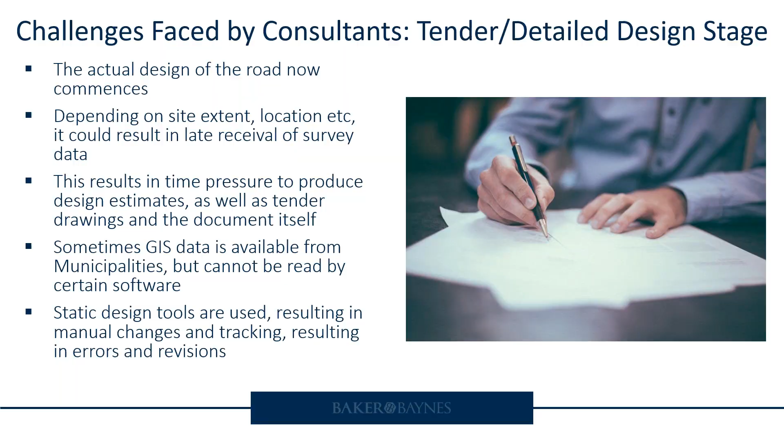All right, so now that you understand the picture, let's jump right into it. So this was the project brief that we are working on. As you know, we've got a road that's 3.2 kilometers long. It's situated at the south coast, KwaZulu-Natal, South Africa. And we were in charge of doing the road and stormwater design. And today we're going to go right up to final construction drawings.

Okay, so where did we actually stop in part one? So just look at the image on your right hand side. That tells the entire story. This is what we had at concept stage, which is mind-blowing. First of all, our advantages are we already have a 3D site at conceptual prelim level. What's associated with that is prelim survey data.

And because we had that survey data that could be imported into a CAD environment, we already have the horizontal and vertical profiles generated, which are actually dynamic. Meaning that if I had to change the radius of the curve, or if I had to move the tangent of the road or something like that, everything updates along with the long section as well as the earthworks, setting out data and so on.

We also have the technology where we can actually bring in the GIS data. So you're going to see that in a short while. Not only that, we have the option to either delete the prelim or concept stormwater network that was provided by us using an automated function in InfraWorks, or we could actually modify it. Today we're going to delete it, which most consultants actually do, and you're going to see how much quicker it's going to be. Last but not least, we've got a dynamic interface.

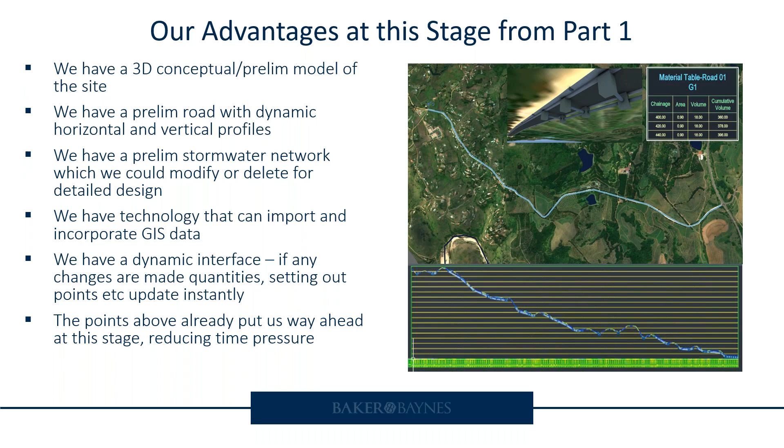Okay, so let's start off by creating a project and collaborating with the teams remotely. Now we're going to use this for Civil 3D, and you're going to see how much easier this is. Because even though we are in level 1, certain team members still might be distributed at home or working at the office, you might be at the construction site, you still need to collaborate irrespective of circumstance. So let's actually look at what we can do.

So let's jump into BIM 360, now known as Autodesk Docs. So you will see that I'm actually signing in here with my Autodesk account. Great thing is if you have the AEC collection, you will have access to this now. So check it out under your project list. So what we can do is give our project a name. So I'm going to be very generic as usual. So Roads Webinar 2021, we can actually select the type of project that it is going to be.

Okay, so you can see there's a lot of categories that are already preloaded into Autodesk Docs, right? And I'm going to just use that one there. And then the construction type, I can set that. I can put in a project value. We can select currency. I wish it was USD, but we will go to rands, right? And then you can also specify the contract type, start and end. It's really nice to do this.

Reason being is that when you generate reports in Autodesk Docs, it is automated and it has a lot of this information preloaded in. All right, so you can see you can give it an end date, start date, you can set the contract. Again, the fields that have an asterisk next to it are compulsory, the rest are fairly optional. I can even attach an image. So let's go and do that, make it look a little bit fancy, if we could use that word. And you can see we have attached the image. We can also populate the project address, which I strongly recommend. You're going to see that. So I've just put that in quickly.

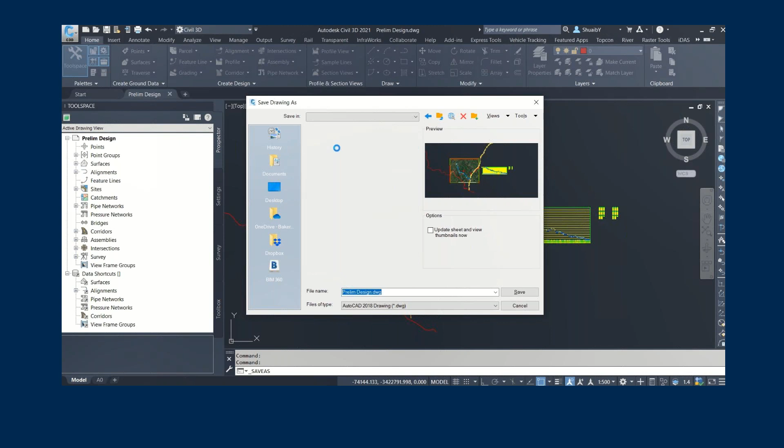Okay, so I'm going to drop it in there and hit save. And once I do that, you'll see it actually shows you that it's saved to the cloud. You've got cloud in brackets there, which is quite cool. So now this is automatically on the cloud, and you've also got the BIM 360 button that syncs in directly with Civil 3D. Again, this also applies to Revit as well as Plant 3D.

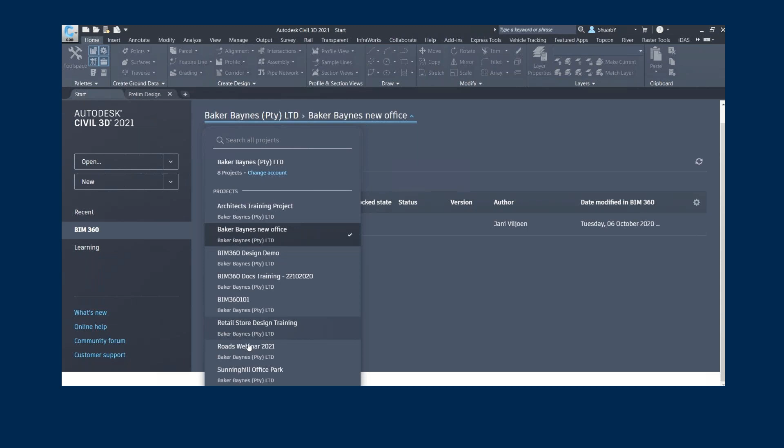And if I go to my folder, you'll see that I will see the same folder structure in Civil 3D itself, which is quite nice. And here we are—actually, I must just move that into Prelim, I think I didn't select that folder correctly, but it's there.

Okay, it's as simple as moving, same thing you would do on your desktop. All right, so our file is now on Autodesk Docs.

The next thing, of course, you've seen that I've created a folder for the Civil 3D data shortcuts. If you're not familiar what data shortcuts are, it allows you to link in files and other users to incorporate them into their designs and work accordingly.

So let's say, for example, one person has created the site and created a data shortcut for it. That site can now be linked into the person doing the roads, and then you might have a separate person doing the pipe networks, a separate person doing the grading for the platform or where the building will actually sit on the building footprint. You can link in that data, and the person busy with it, it will be locked so I couldn't edit.

If I was doing the roads, I would not be able to edit what the stormwater engineer is doing currently. But as I refresh my drawings or update my references, I will see his model getting longer or progressing as I'm doing mine, which is pretty cool.

So let's look at how we can use Collaborate Pro, previously known as BIM 360 Design, in achieving this task.

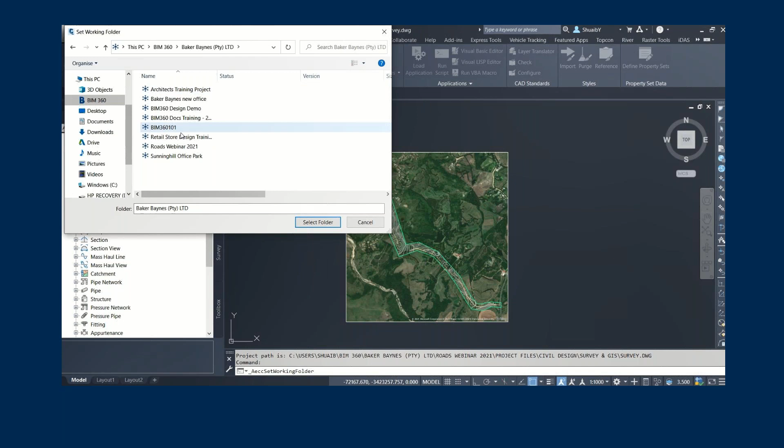First of all, you're going to need to set a working folder, and I'm going to route this instead of to my server, I'm going to do it to my BIM 360 account, which is amazing. Like I said, there's no need for servers anymore if it's cloud collaborated, and it's much more secure, right?

So you can see that data shortcut is there. Now the common mistake that users make here is not knowing where to go next. I'm going to show you this. Like you can see, that's the wrong button to create. If I go maybe to set shortcuts folder, you'll see it's blank, right?

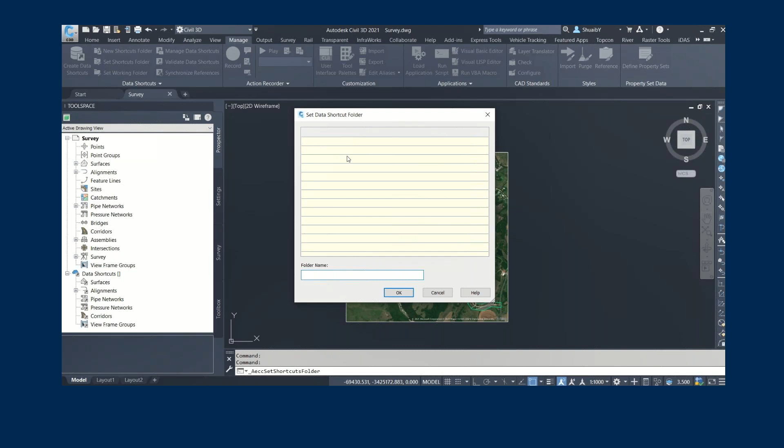Now you can do this by trial and error, but the correct thing is to actually create a new shortcuts folder. Now I can give this a name, so I'll call it Civil 3D Design Shortcuts, for example, and you can see it's already routed to my BIM 360. The cool thing is if I move it anywhere in BIM 360, it's going to update that file path automatically. We didn't have that functionality before when working off a server.

All right, so what I'm going to do is link in that survey data now, and you can see that shortcut has been created where that survey data can now be brought into my detailed design. So we've actually created the survey data. Currently you're seeing the prelim, but you're going to see how we can actually sort that out right now.

Okay, so now for the interesting part where I think everyone's going to be locked in: creating the construction design model from the prelim using Civil 3D and IDAS.

At this stage, if you're doing it the traditional way, you have no data and would have to start from scratch. But we've already got prelim data. Can we reuse or modify it? Absolutely yes. Please don't go and restart a new drawing from scratch. Although you can, I strongly don't recommend it. This is going to save you so much time. Just follow along here and you'll see what I'm talking about.

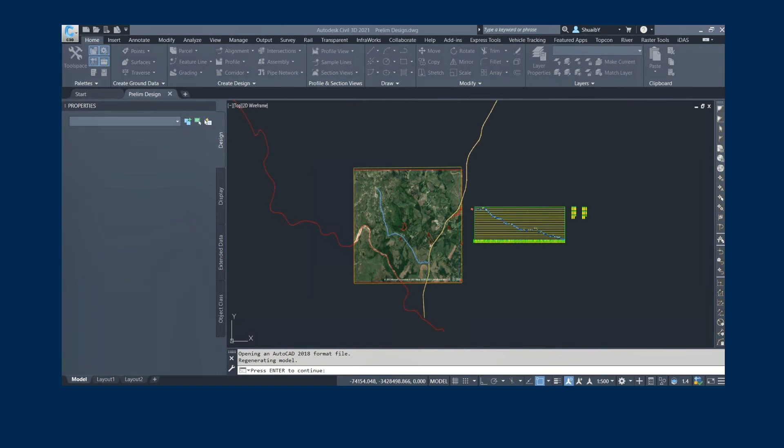Let's start by importing the survey data and GIS data captured by the surveyor. So let's switch into Civil 3D. I am going to open up the prelim design I did, which has now been uploaded to Autodesk Docs in BIM 360. You can see it's actually linking in from the cloud, so it might take a few seconds depending on the size of your drawing and your internet connection. As you can see, the file has loaded perfectly.

Now, instead of creating a new drawing, I'm going to save this as a detailed design. Simple as going to save as, giving it a name, and dropping it into BIM 360. So this will be our detailed design drawing. Now imagine if you had to do this by creating a new drawing and starting from scratch - it's going to take you much more time.

As you can see, it's already routed to my BIM 360 file path, which is perfect. I'm going to drop it in my detailed design folder. And that is it. So we've got a drawing that we can use to do our final design, so that our construction documentation and tender documentation can be generated. As you can see, it's saved on the cloud. So that is the first step.

The next step now is if we go to BIM 360, you can see that is the prelim drawing. Let's just go back here quickly. Okay, so we are importing that - I'm just going to forward this a bit quickly. Right, we saved the detailed design drawing and it is on the cloud. Now what we're going to do here, let me just skip back a little bit.

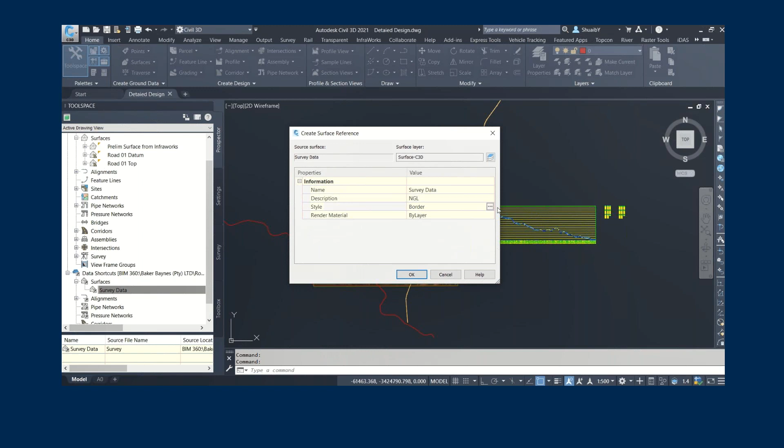We've created a data shortcut already, and you can see we've got all of the associated data from our prelim design. All I've got to do is drag and drop that survey data into the drawing. This is the data received by Anin, our surveyor, who uploaded it. I can give it a description and set whichever style I want. Let's go with a 0.5 meter to 1 meter spacing for the contours. Now we've already got the alignment in, though we might have to make adjustments depending on the final survey data. You can see it shows our survey data has been linked, and again, this is not using a server - this is using purely cloud collaboration.

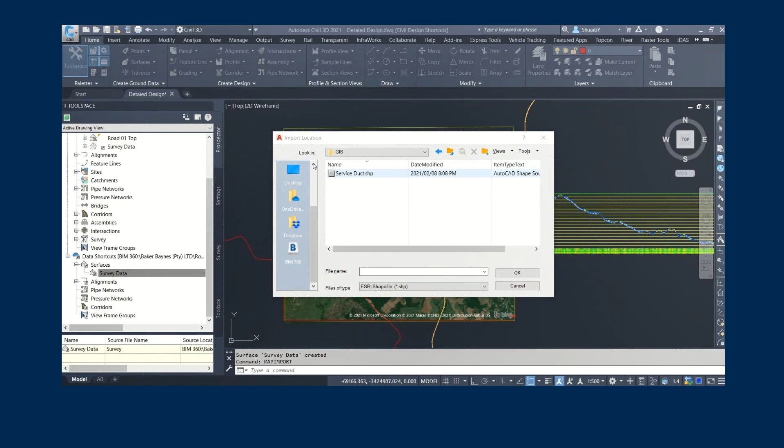Now what we're going to do next is bring in the GIS data. Anin has actually uploaded this to our cloud, so we can bring this in. You have two options: either link it from here, or most people just download it and import it into Civil 3D - it's totally up to you. If I go to the GIS folder, you'll see we've got a service duct at a certain point in the road. As you can see, I'm bringing it into Civil 3D from BIM 360 - it's downloading that very quickly.

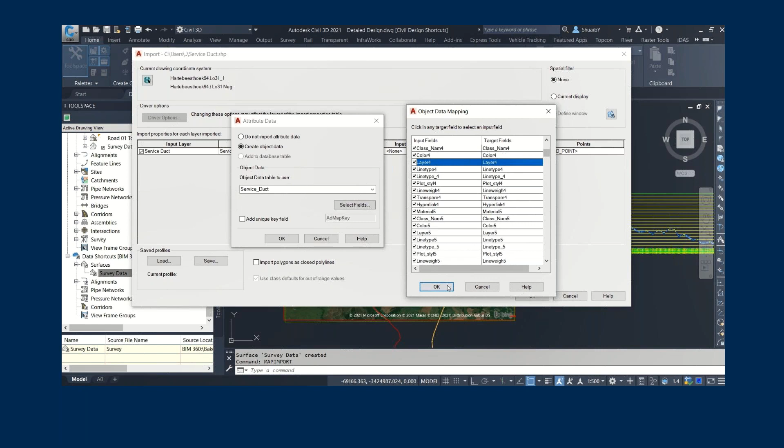Once it has been imported, you'll see the GIS menu pops up. This is built into Civil 3D. I can actually bring in the object data associated with this - sometimes you might not have any, but in this case I do. Good GIS data has a lot of metadata attached to CAD elements. If I go to select field, you can see there's a lot of metadata attached to this, some being CAD and some being different elements that I can tick on and off. I'm just going to leave it as is with all of that ticked on.

Once we hit OK and we hit OK to import that in, you can see the import has been complete. Now, if I zoom in, this is what has come in. It might look just as a polyline, but let's go and check out the actual properties. As you can see, we've got the start and end levels. We've got all of the associated data.

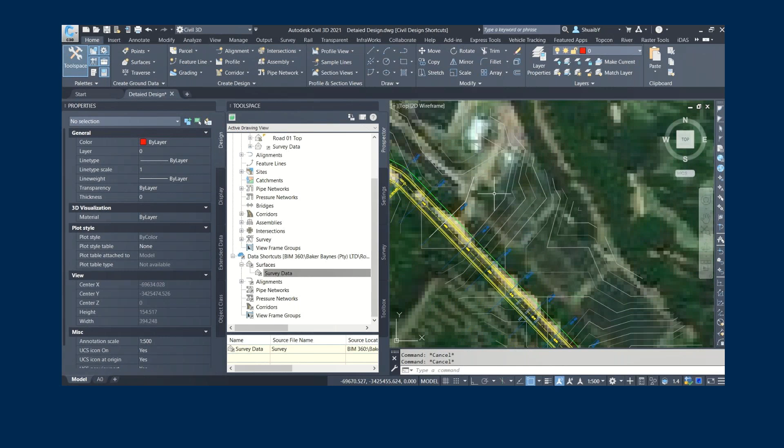Not only that, if I go to the OD, which is an object data table, there is all of the information in there. We've got the start invert, end invert, the size of that culvert. You can see it's 1.5 by 1.5, so maybe like a duct type of scenario that's running below the road or below the NGL at that point. So you can see how easy it is to actually generate or incorporate GIS data into your design.

But we don't want to just stop there. We want to actually create an object from it. Now let's look at what we can do. Again, we are using the Devitech iDAS template for Civil 3D, which is fantastic. Strongly recommend that you use it. And what we're going to do is we're going to change that or assign an object to it.

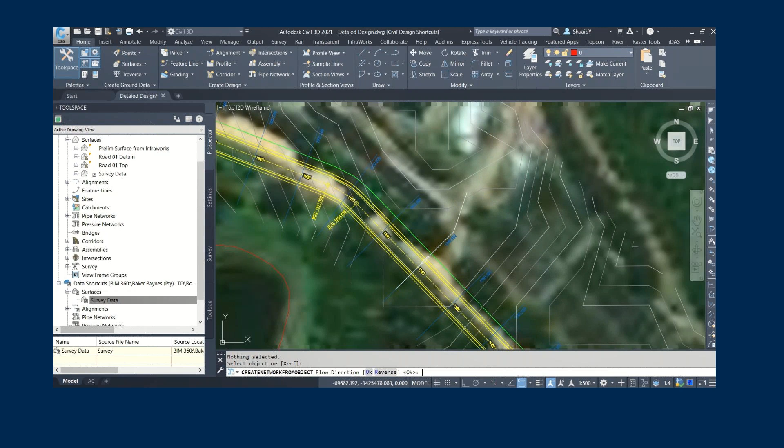Now, what we can do is once I select that line, I am going to go give it a name. So this network is probably, let's just call it a service duct, just to keep it simple. Right? We can assign what type of structure it is. Because it is a duct, we can actually select it from the Devitech iDAS templates that has been built in with the pipe networks. So we've got a 1.5 by 1.5. Of course, it's going to be relative to the survey data, right?

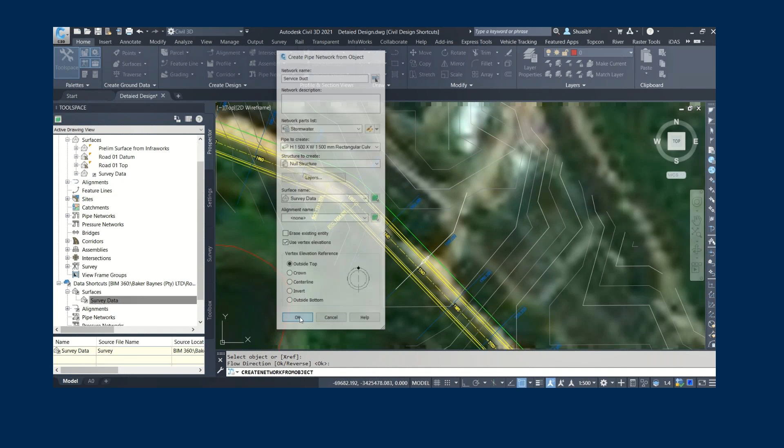You can see the prelim data is still there. You can actually delete it if you like, or what I do is just switch it off. And I want the elevation at the outside top of the pipe. You could go crown, you could go invert, depending on what you want. And you can see we have now generated it into an object. If I go to the Civil 3D object viewer, this is what is currently there.

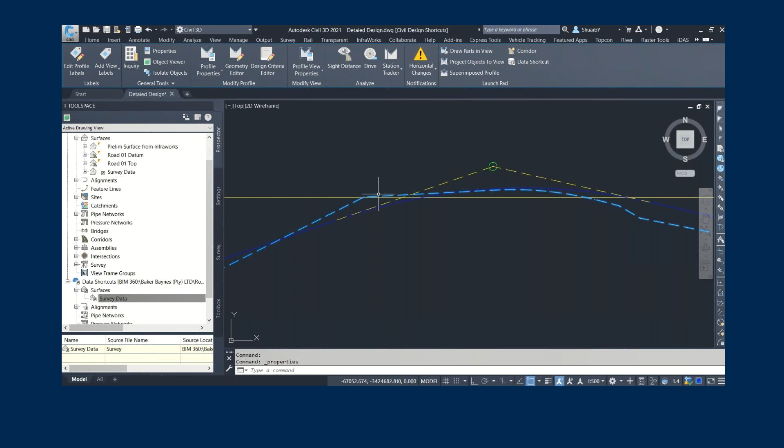Do I have to delete this long section? No. But just to show you that it is still that data and we're going to change it, I will actually show you what profiles we have available here. So if I go to the profile properties, you can see it's still the InfraWorks surface data that's there. And if I select that profile, and if we go to the profile properties, it's still the initial profile that we have done. Now, how do you incorporate the latest survey data onto your long section? It's very easy. Let's get into that.

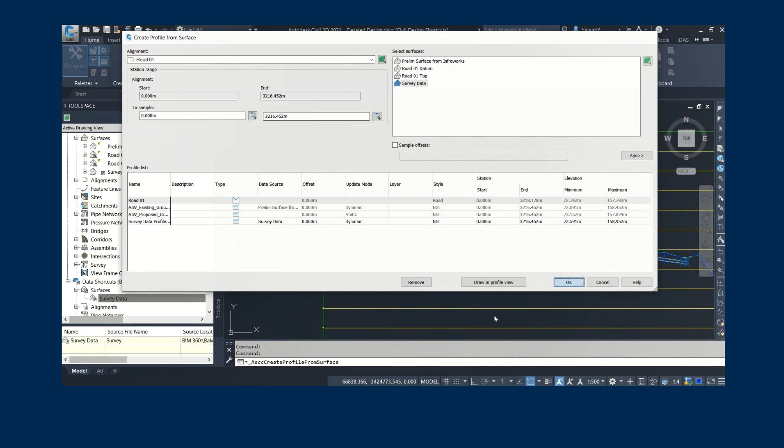So I would go and create a surface profile, and I would go to my road. And what I will do is that survey data that has now been provided to us by our surveyor, I will drop it in. Now, currently, you might not be able to see it, but after a few seconds, you'll see that there's an extra profile there. And if I go to the profile properties, you can see that is the detailed survey data that has now been incorporated into your design. Pretty cool, right? You don't have to do this all from scratch.

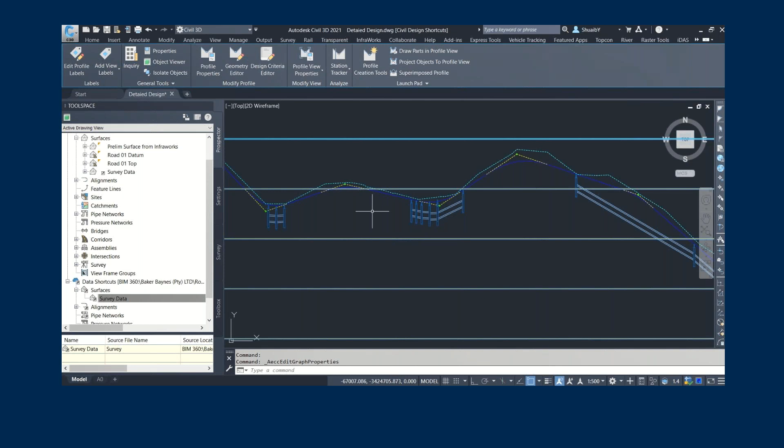And what I would do, just to make it easy, I will switch off the InfraWorks surface data that I've got. I will keep the data that I need to reference, and now it has become much cleaner to work with. You will see that that profile has disappeared, and I've got just the NGL of the survey data and the horizontal alignment. As you can see, the survey is more accurate, meaning that certain portions of the road are a bit too low, or the elevation at that point was actually higher than what we had in InfraWorks.

We could actually update the position of the alignment using the grips like what I'm showing you here. We can raise it, we can shorten the curve, we can also insert or delete certain points. So depending on what you want, these are basic Civil 3D commands. And if you want to be much more accurate, you can go to the editor and type in exact values that you would like.

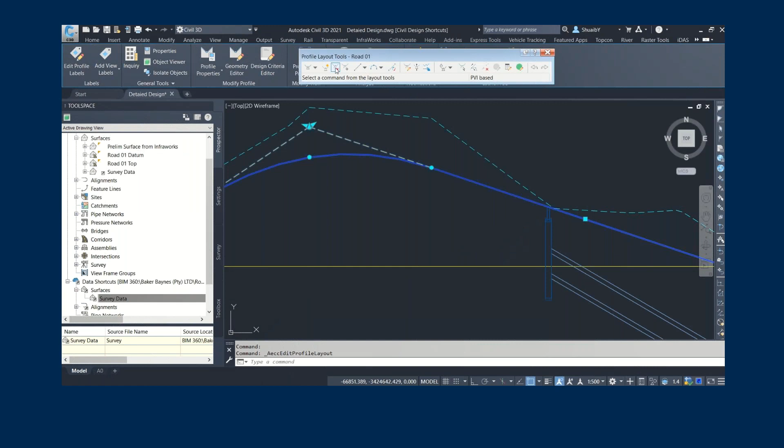Okay, so if you're more of a CAD person, you would definitely gravitate towards using the grips. If you like typing in exact values like probably an engineer would do, you've got best of both worlds, basically. Okay, you can also see that the Stormwater Network is actually still there from InfraWorks. We are going to delete that soon so that we can actually create a much more detailed one.

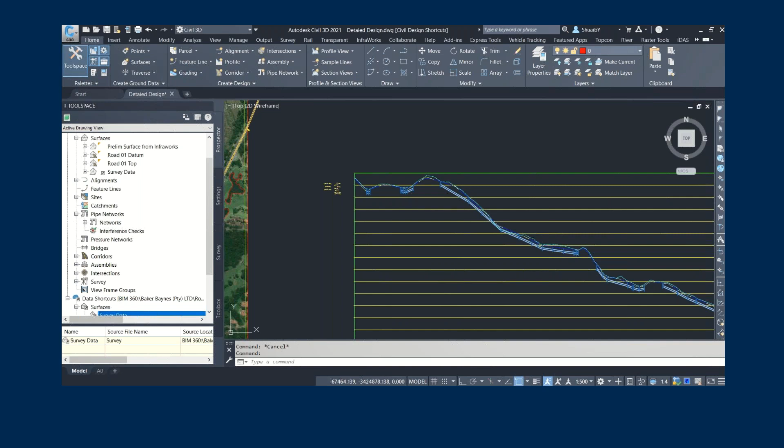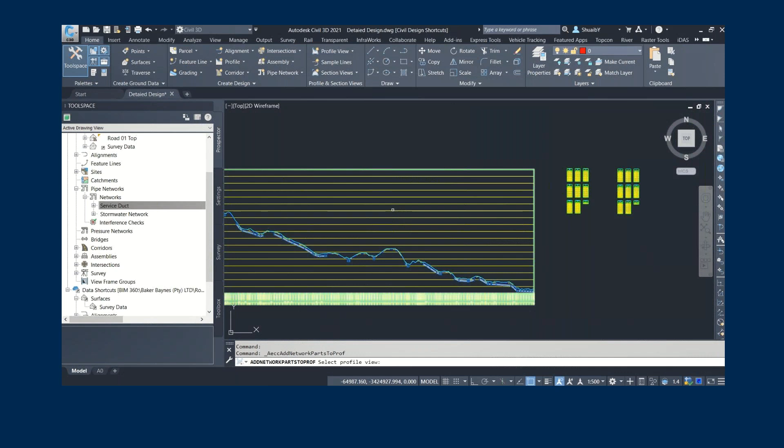So our service duct is still here. And what we want to do is impose this onto that long section to see if we have enough cover, right? So I'm going to drop that in here. And once I select the long section that I want to display it in, look at that. I mean, if you can have that visually on your long section, that is just amazing.

You can use the measurement tools in Civil 3D to check if that cover is maintained, and you can actually raise or lower your vertical alignment accordingly. So it's pretty awesome that you can incorporate GIS data into your design. The next thing is the Stormwater Network.

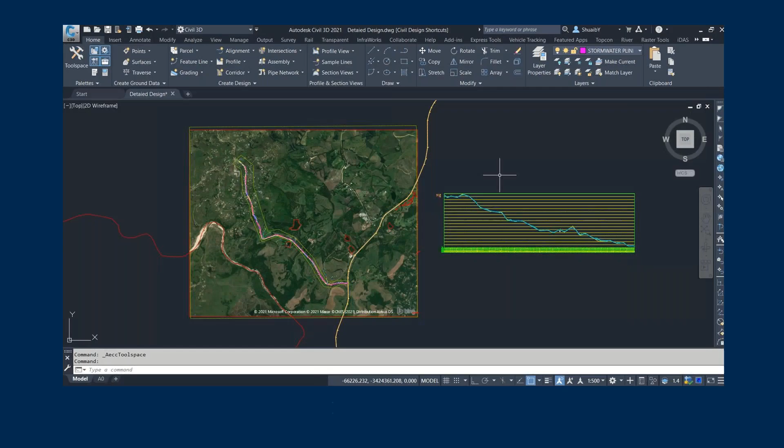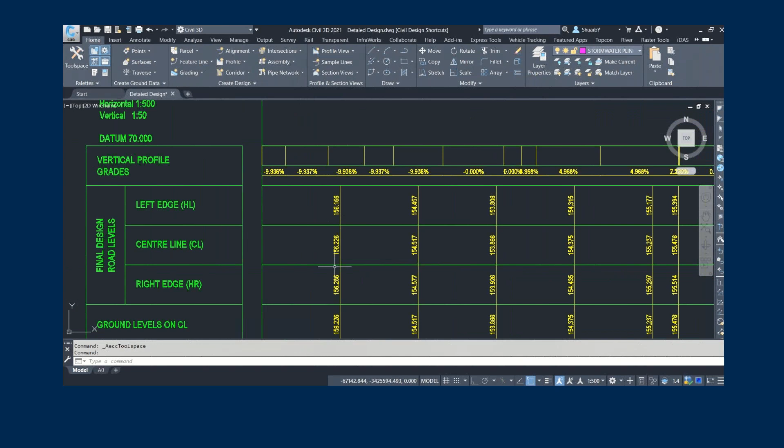Okay, so let's go and look at the stormwater design. So I've fixed up my long section, right? So based on the latest survey data, you can see my GIS duct is there. I've got enough cover, and of course I've sorted out the bands so that it reflects the correct levels. Please don't forget that that is a very crucial part.

And I've also assigned the super elevation to this. Super elevation is very important for stormwater, right? We all know that. And as I pan towards the right, you can see it actually gives you the super elevation diagram in the long section, which is quite cool, and it gives you all of the associated data.

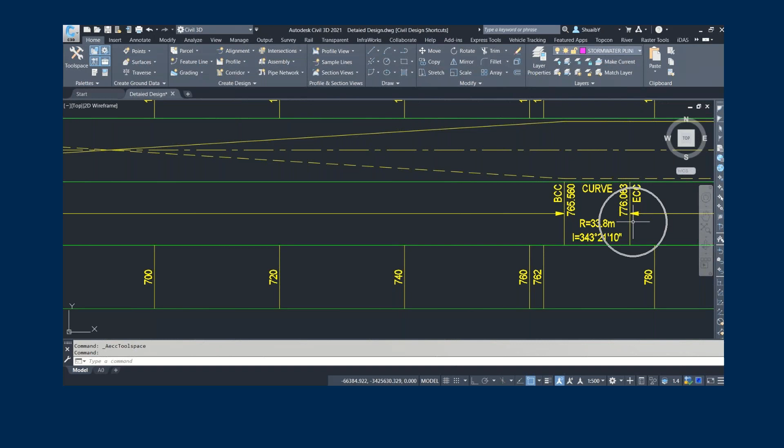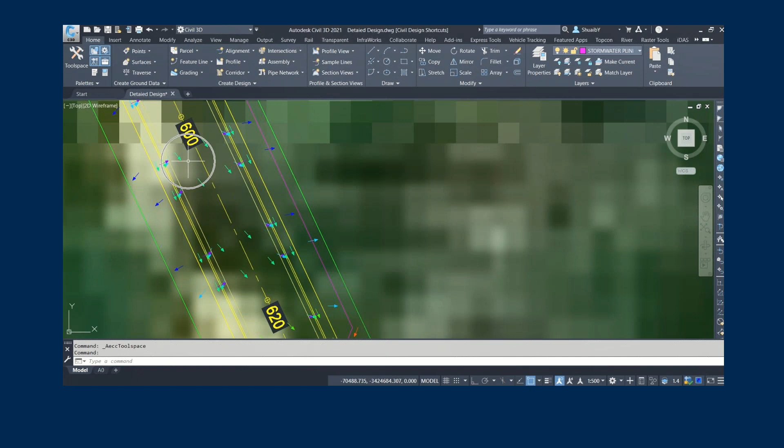As you can see, I'm just showing you the super elevation applied. So I've switched on the arrows on my surface, and you can see the road is sloping accordingly as per my stormwater design that I envisage, right? So we've got all of that data in here, and we've also got the latest survey data. All right, so that is going to be flowing in there accordingly.

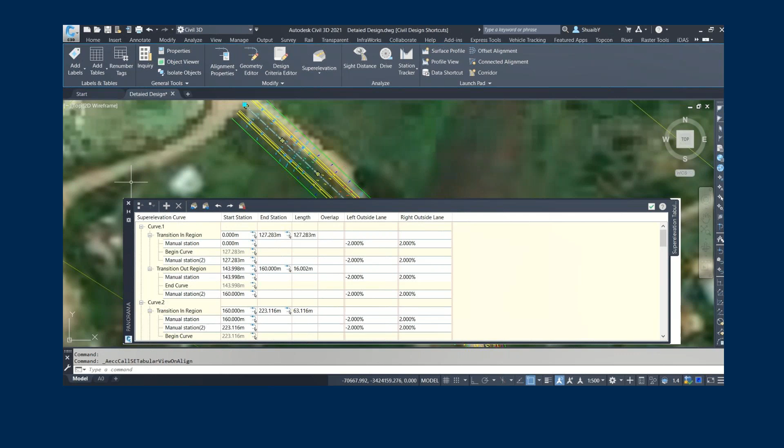If you wanted to edit the super elevation, you could always go to the tabular editor and input these data accordingly. Or you can use the automated function and edit it where you'd like. It's totally up to you. So we've got all of that done. Super elevation is done, the road is done, we've got the final vertical profile.

What I've done to save time is I've drawn a polyline that will represent my stormwater network, right? Now I'm going to head over to the IDAS menu or ribbon, and we are going to go and optimize this or create a stormwater network. So we're going to define it. As you can see, it has a really cool new interface that's really amazing.

Not only that, we have a lot of the South African catalogs that are built in here. All right, so you will be familiar with a lot of those municipalities right there. We can select whatever we'd like. Same with the structures. Okay, in this case, we're going to be using Rocla, very commonly used in industry, but there are a lot of other catalog providers that you could use.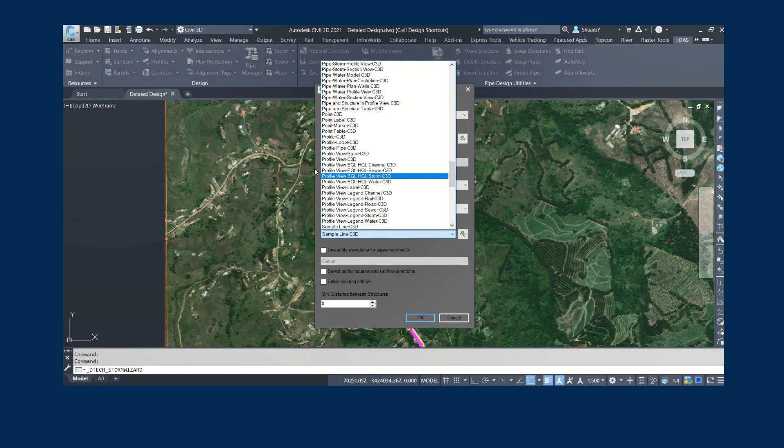And what I'm going to do is I've got that polyline in a selected layer. So again, your AutoCAD still plays a role here in terms of process. It makes your life much easier. I'm going to select that polyline layer, and I can also set the outfall if needed. I'm not going to do it at this stage, and I'm just going to delete that polyline. Now, once we do that, you will see it'll take a few seconds, right?

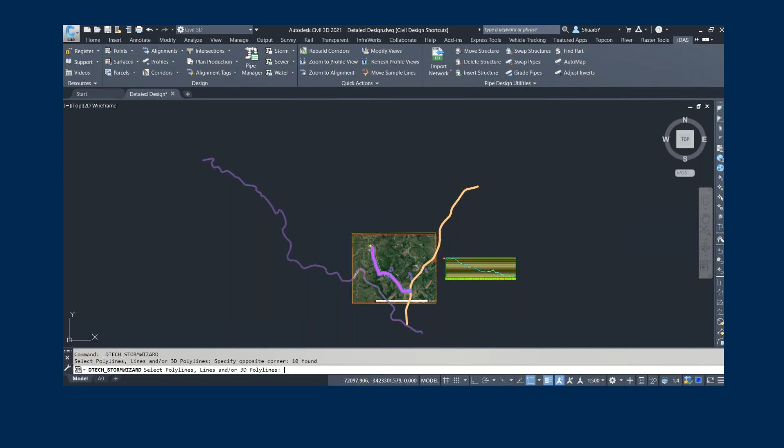So I will select the polyline. It'll filter out per layer, and after a few seconds, if I zoom in, my pipe network has been generated, as you can see it there. So just to show you that I am not bluffing, I will click on the structure. Now I can swap the structure to an inlet, to a manhole, whatever I want to.

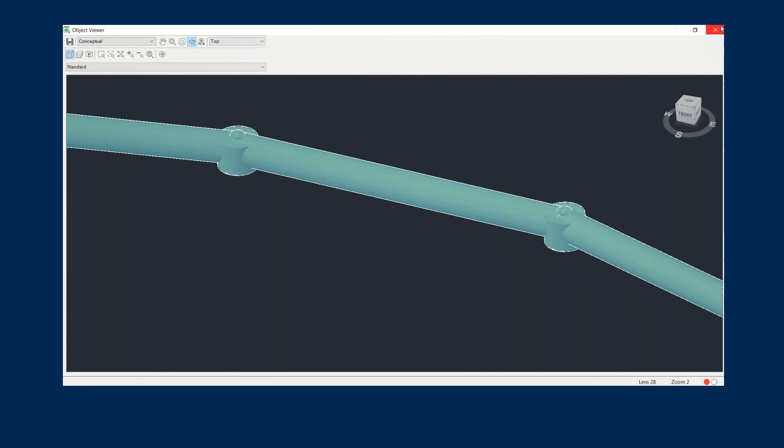And just to give you much more credibility, I will select the network and let's go and have a look at it in 3D. Right, so let's go and have a look quickly. And here we are, that's my entire network. If I zoom in, you can see my pipes are leading into my manholes in this case. I can go and update the structures. Like I said, there are a lot of amazing features in the IDAS for Civil 3D.

And we've also got the pipe manager. I can go and swap the structures. I can change the pipes when needed. But what I'm going to do now is go to the pipe manager. And this is how it looks in the IDAS. So you can see everything is in Civil 3D. You're not hopping between two different applications. It's all in one interface. And I can go really detailed here when it comes to the pipe networks.

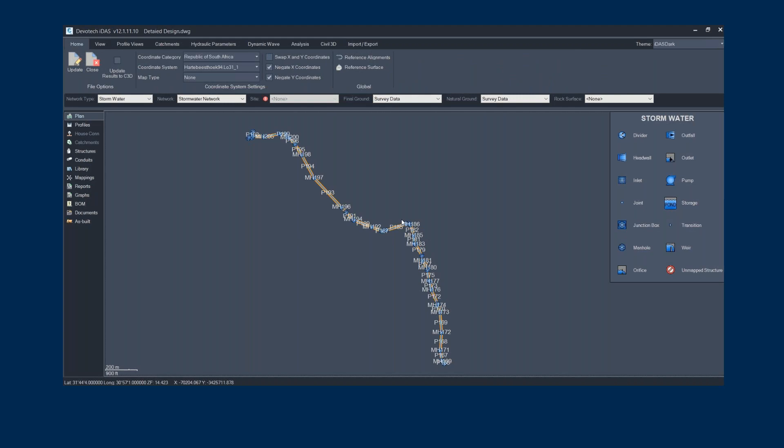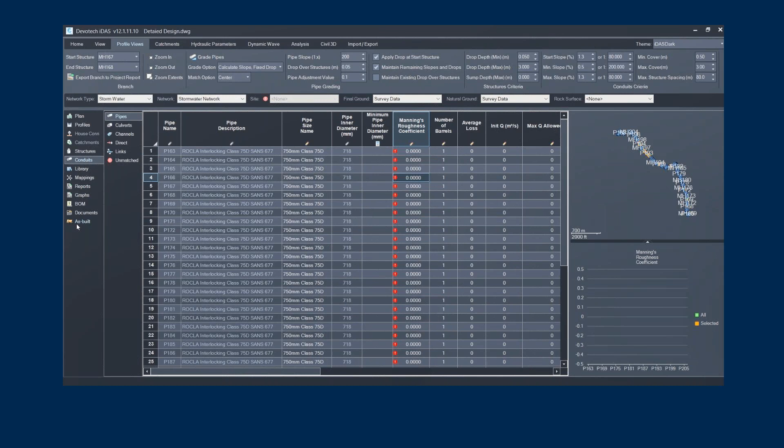I can zoom in where I want to. I can adjust the cover. I can regrade the pipe networks, which we're going to do just now. I have an entire list of the structures. I can specify the Manning coefficient, right? You can see those exclamation marks in red actually telling me that you haven't specified it, which is really cool. It guides you on your process as you're doing the design. I can get the quantities as well. And if you get lost, there's a built-in help file to actually help you with this. So you've got enough support here, and it's a very visual, very simple type of interface to use, right?

Because I haven't made any changes, I'm gonna just close that, and I am back here in the Civil 3D window. Right, so we've got all of that done and dusted, and our pipe network has been generated for stormwater. Okay. Now, not only that, the surface is also available here. Now, what role does the surface play? I can actually go and create what we call a watershed. The watershed will help us to understand the flow of water, or the perceived flow of water based on the sloping terrain at that point. Right, so you can see I have actually created that in the background. I'm just going to run a quick analysis here on the surface. Here we are, everything looks good, hit OK, and this is the result.

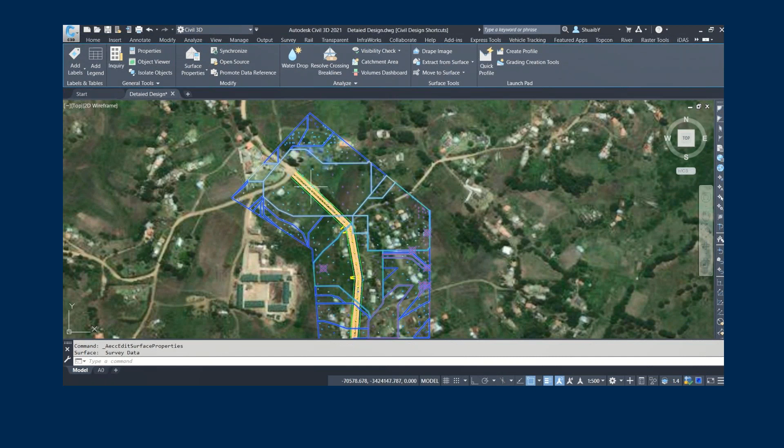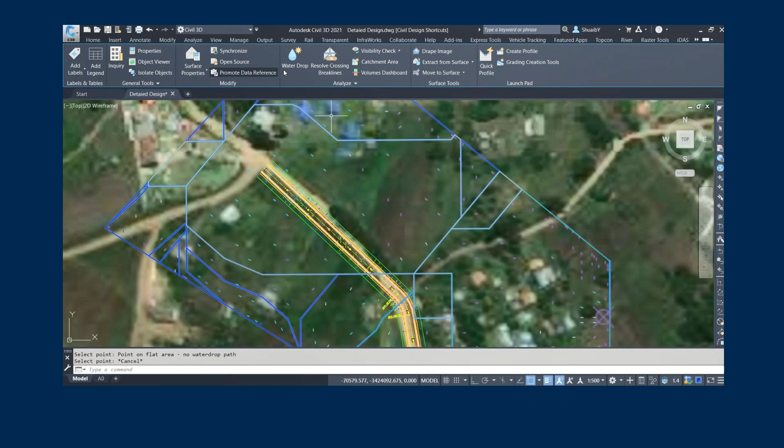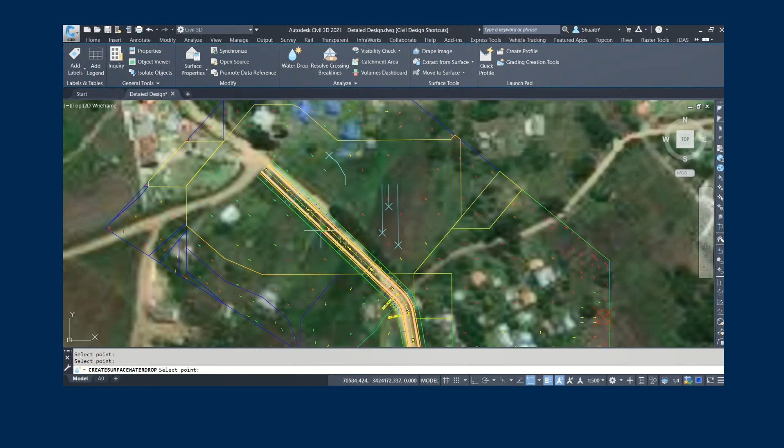Okay, now look at this. It has actually segmented the surface according to slope. Something that you would normally trace in Google Earth, right? But you wouldn't be this detailed. Look at that, it actually gives you the arrows or the slope direction at that point. And the cool thing is we've also got a water drop feature that wherever we click on the surface, let's say water is falling at that point, it will show you the direction of flow, the X being the point the water is dropping. And as you can see, it's absolutely correct. You can see the flow of water.

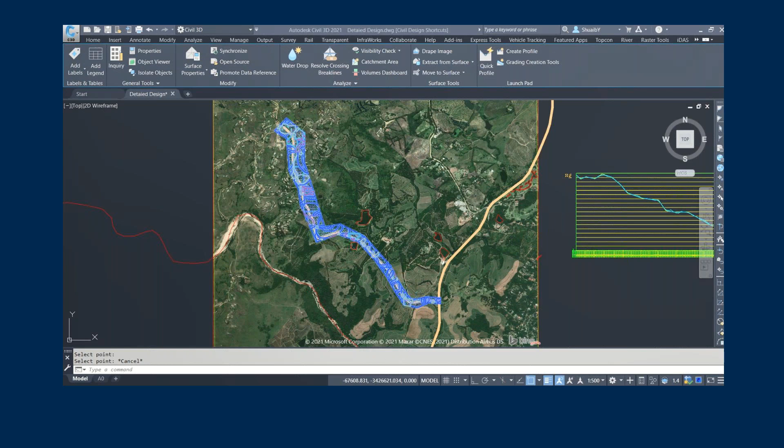Not only that, it gives you the low points, that's what that X and O symbol stands for, that is the common drainage point or the lowest point in that area. So it's really, really cool. And then from there, you can base your design, swap your structures, create your catchment areas, get a rational method in there, get your longest water course, those type of things, and you will be good to go. Right, so that will take you through your stormwater design.

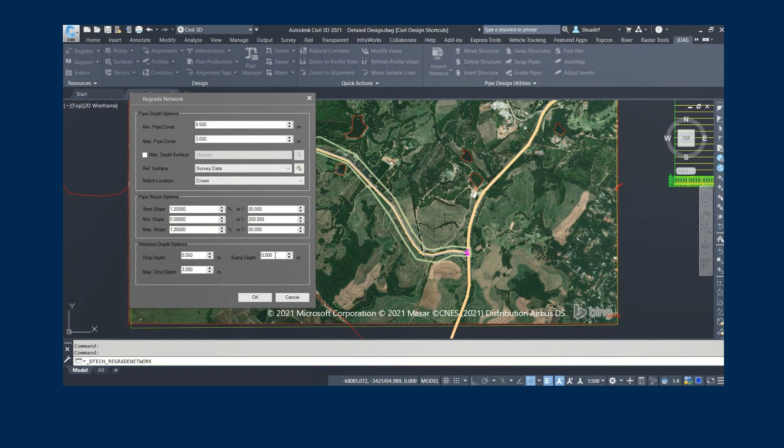Now, here we are, right? If we go back to IDAS, we can actually also regrade the network, which is very important. If we go to OK, we can set the cover, right? So if you want a cover range of 0.5 meter to 3, it will actually grade this accordingly. And I want this to go to my crown. I can set the start slopes, end slope, the sump depth, whatever you want to. Once I hit OK, it will actually sort out the long sections according to that parameter, which is amazing, right?

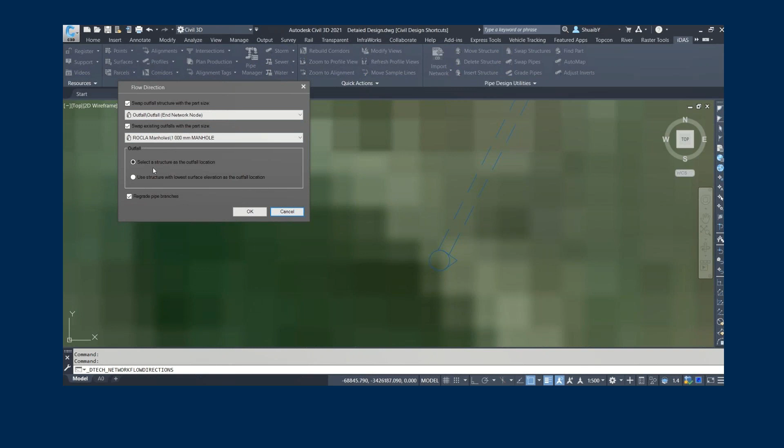You can see I've already defined my outfall location. That's why that symbol looks a bit different. If you wanted to specify it by yourself, if I go to the flow directions in IDAS, here we are, I can select outfall and I can actually go and click where I want the outfall to be positioned. But I've already done that just to save time. Again, it's highlighted in my Intelligent Stormwater Design webinar series.

So once we have that, if I go back to the pipe manager for Devatech IDAS, you will see that there's a Civil 3D tab where we can create the profile views, and that's exactly what we are going to do. So we can set the start number, the style is set already, which is quite cool. Just make sure the correct survey data is selected for sampling, and of course, with the amazing styles that have made it so much easier in IDAS, look at that, it's so much easier to understand and read.

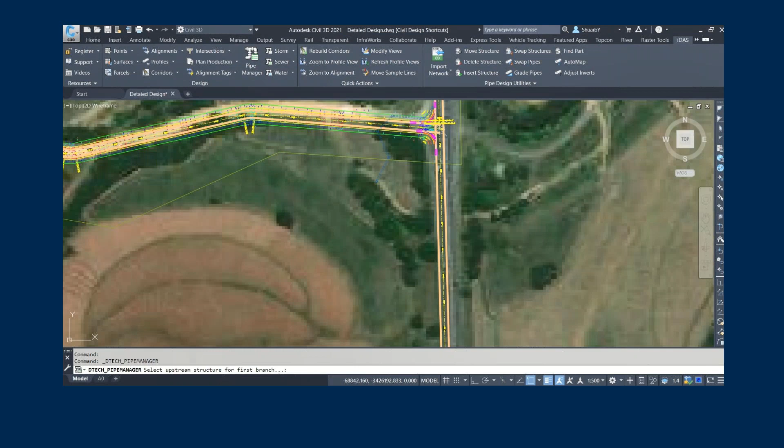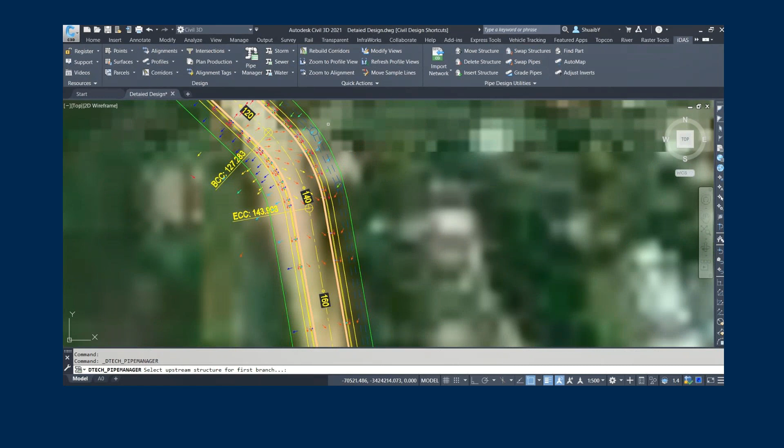Okay, so we're going to use the stormwater in this case. Like I said, you can use IDAS for sewer, bulk water, water reticulation, house connections, all of that. In this case, we're just using it for stormwater. Now, once I do that, in the command line in Civil 3D, as usual, it will tell you what to do. As you can see here, it's telling me to select the upstream structure. So I'm going to use maybe somewhere up here. Okay, so you'll have a very educated analysis of this position.

So once I select the first structure, I can then go somewhere clean in my drawing and drop in the long section for the pipe network. So maybe somewhere there. Once we do that, I can close this window, but I want this to update in Civil 3D. So I would not use this function, right? If I go back to the Home tab, I will hit Update, and that's it. Now, the reason why we have this is sometimes you make some changes and you don't like it, and you don't want it to sync. It gives you that flexibility sometimes.

Okay, here we are. Here's the long section done and dusted. So let's have a look at this. Here are the pipes. Again, I can use the basic Civil 3D grips to adjust the slope, move it up and down. And you can see the structures are actually not positioned correctly. But how would we fix that? It's very easy. Okay, so let's have a look.

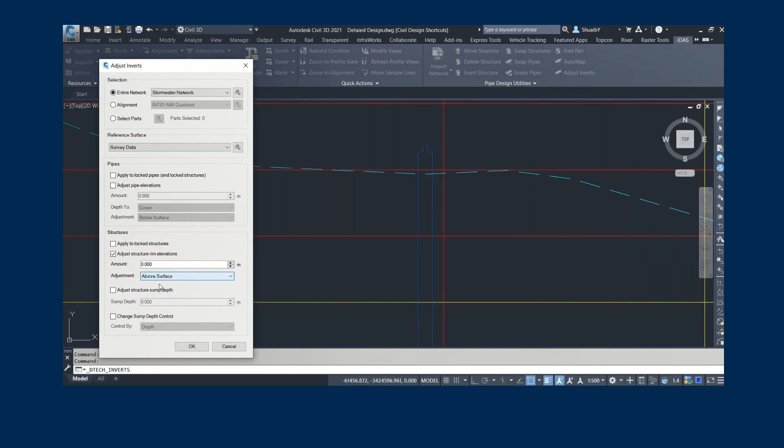Now, we don't want the structures going above the ground surface. And with IDAS adjust invert functionality, we can set that so that it is 0 below or above the surface, right? So it's going to be tied in exactly to the NGL as we want it. And once I hit OK, it'll take a few seconds. As you can see, it's processing on the bottom right corner there. And once it's done, here we are. You can see it snaps in perfectly to where we want it.

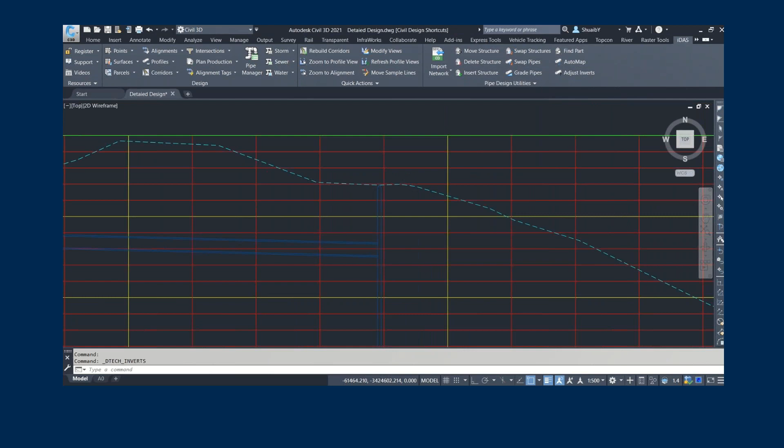Now, generally, Civil 3D, if you had to use the pipe networks, it's quite cumbersome. You might have to do it manually. It doesn't actually grade according to your pipe rules sometimes, but Autodesk really blows it out of the park in this and makes Civil 3D so much better to actually use in this phase. All right, so we've got our long sections done for both our road as well as our pipe networks. Now let's get to the quantities, right?

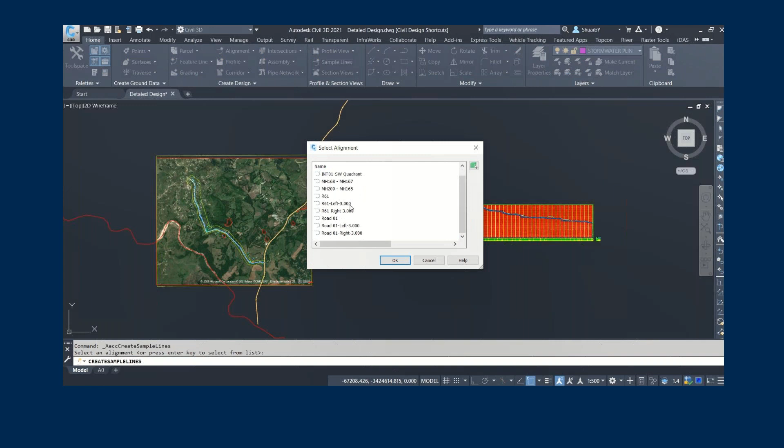So we've got everything done and dusted. We need now to actually get the quantities for the roads. This could be the earthworks, which we are going to be doing first. And that's the difference between the design level and the NGL. Very important for our quantity estimations, right? For our BOQs. And here we are.

I'm just going to toggle some of the styles here. It's much better visually, especially when you're doing cross-section sheets. The process for that is also the same as long sections. You just might have to set up your viewport to a section view. So what I'll do here is I will sample my road at every 20 meters, like you're seeing there. Again, basic Civil 3D stuff.

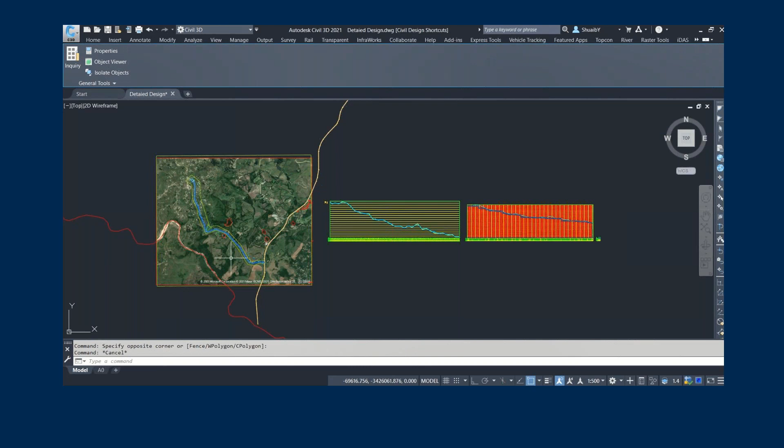And once I close this ribbon and we zoom into our plan view, you will see that the sample lines have been created at 20-meter increments, which we can adjust accordingly if you wanted it to be closer or further away. There they are. Okay, so we've got that, and now we can actually go and compute our cut and fill. Pretty easy.

These steps are the same as we've done in part one, so I'm going to fly through them very quickly. We're going to go to compute the materials, select our road alignment, just make sure if you have multiple alignments, it's the correct alignment. And of course, we've got our cut and fill style, again, IDAS, making it much easier to read. And we are going to specify our relative surfaces to sample.

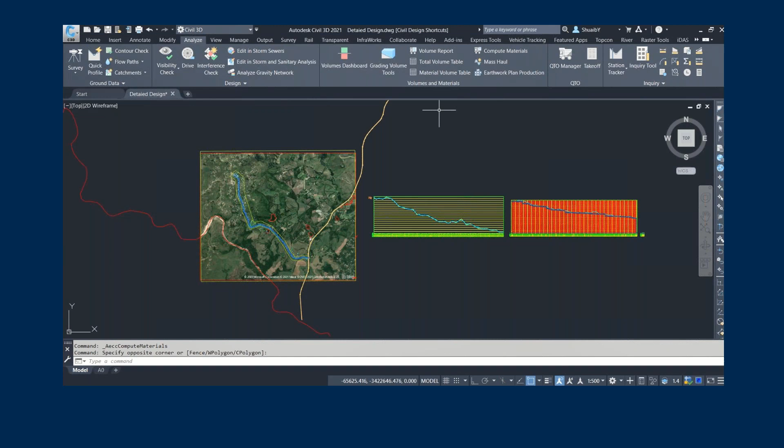As you can see in the bottom left, it will take a few seconds to compute. The longer your road, the more seconds it would take. I mean, that is obvious. And once we do that, we can now go and generate a report or a volume table. Now, people like tables, so I'm going to go with tables here. Again, you can see everything is set up. You can adjust the number of rows.

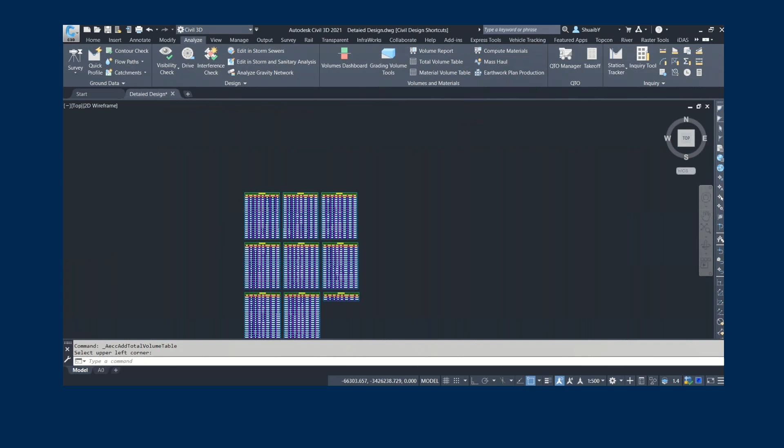Main thing is it is dynamic, meaning if you move the alignment, the earthworks actually update instantly. If you switch it to static, that is on you. You got to make sure that you know what you're doing. And here is the result. We've got all of the cut and fill material for our road construction already.

The next thing we'll do quickly, I will just do it for one layer, is to compute the structural volume of the pavement per layer. Now what we will do is we will just do it for the first layer being your asphalt surfacing. All right, again, I covered this in part one, but I thought it'll be a good refresher for those that are joining for the first time in the series.

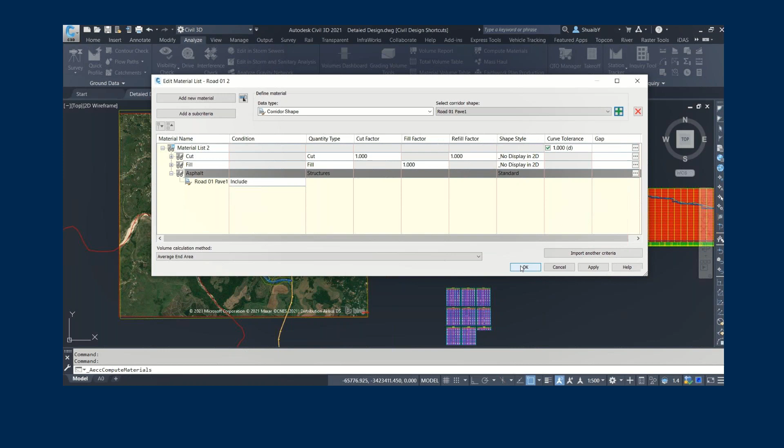And I will select my pavement accordingly, and I am done. Once I've done that, I can just hit OK. And in the background, you will see it will start computing. You can see the command line, it's saying compute materials, and it is actually done. So let's go and generate another table here.

Okay, so we're going to do a volume table where we now can go and select that structural volume for asphalt. All right, again, we're using the style set by the Devitech Civil 3D template. We're going to click in here, and this is the result. Pretty cool. You've got everything at your disposal that will help you with earthworks, volumes, and so on. And that is it. You could also go and set out the tables for your network. So let's do that very quickly.

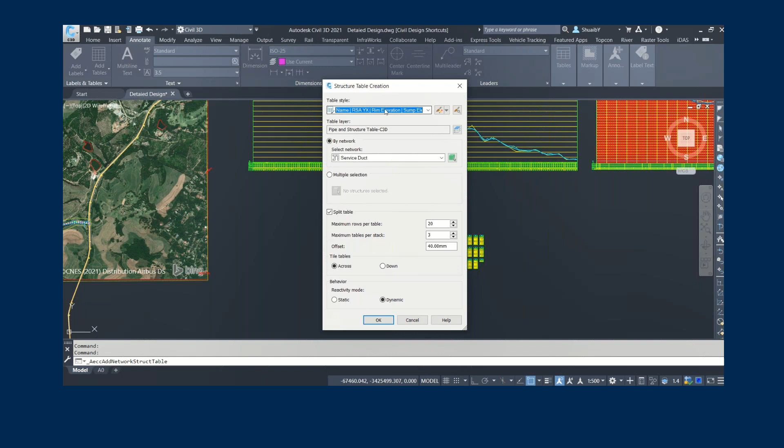If I wanted to create a pipe network table for the structures, you can see Devitech has a ton of styles that can suit you. All right, we're going to make sure that it's set to our correct network. Drop that in, and this is again what you are given. Really neat and crisp with all of the information that you would need. Let's do it one more time just for the pipe networks. So that was the structures.

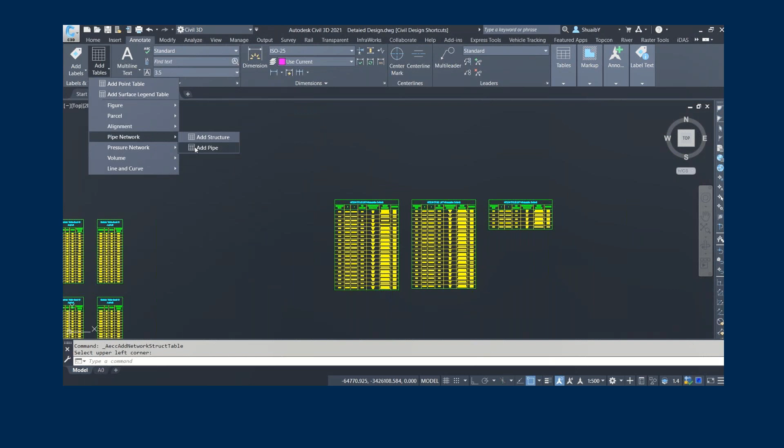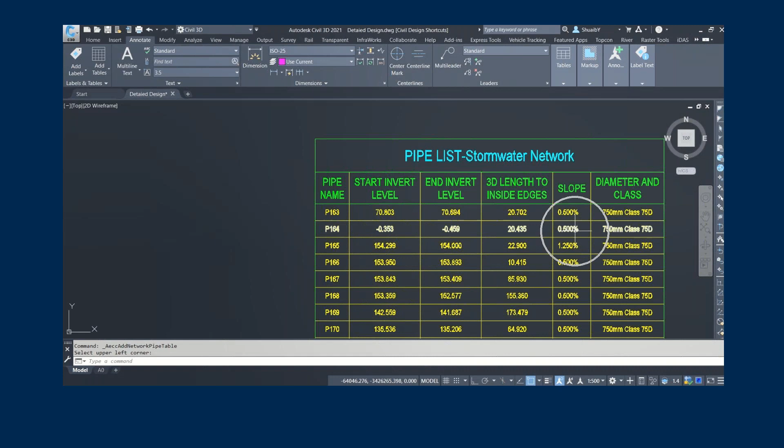We're going to do the same thing again, a whole plethora of styles that are available to you, and we will just hit OK, and we will drop that maybe somewhere to the right, and you will see it gives you the pipe, the inverts, the class, all of those things that are in there. And that's how easy it is to actually just generate all of those quantities for you. You've got enough here that could actually make your BOQ a much easier task to do.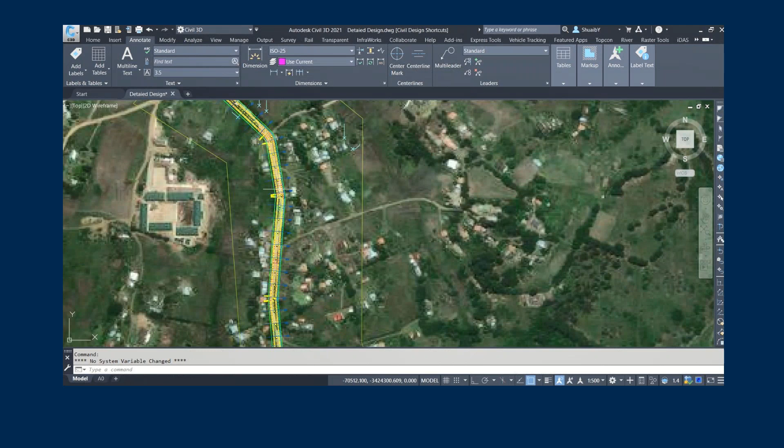Last, but second last, in our process before we generate the construction drawings is creating the setting out tables. This is important for construction because as a consultant, you need to provide that to your contractor. I've added the labels in using basic annotate functions, including my PI label, the start of my road, as well as the end of my road.

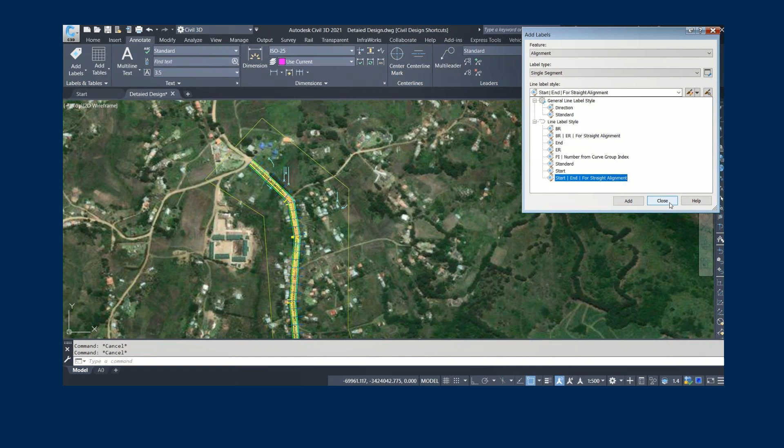All I've got to do now is create a quick table. If you wanted to know how it was done, I went to label settings, turned it on, used the IDES styles, added it into my alignment, and it was done. Pretty easy. Let's generate a table for the alignment setting out data.

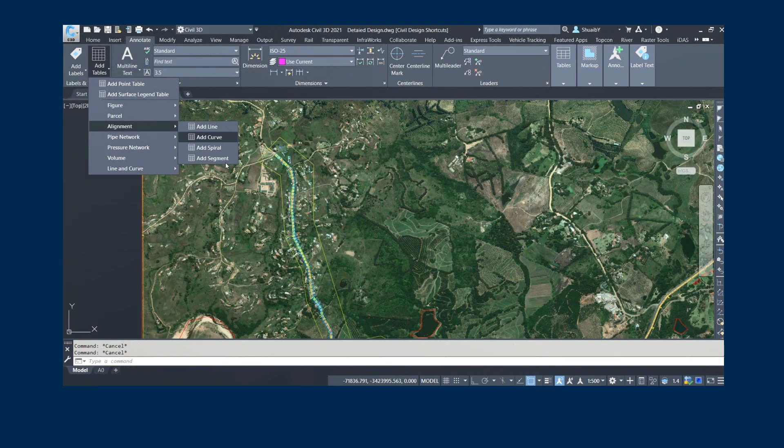This is just going to be for the from start to end. I'm going to select my correct road again, a ton of styles in this template, really amazing, and it is of course dynamic. I will drop that maybe somewhere here.

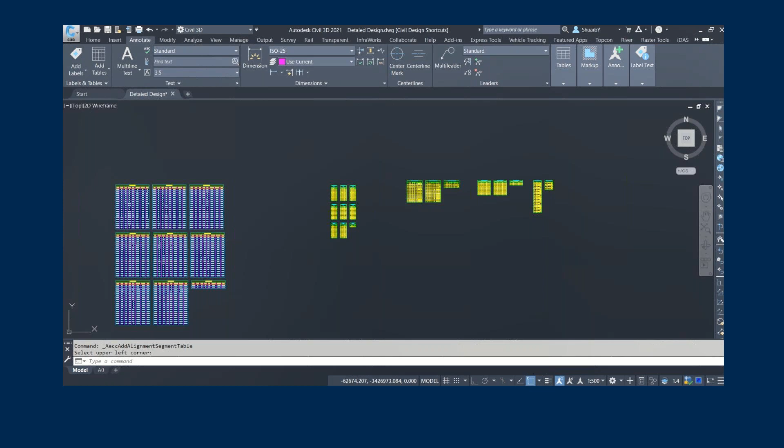You can see setting out data done and dusted. Really nice, you've got your BCC, PI, and ECC also detailed in this table. You can also export this to maybe text format or LandXML where your surveyor can take that in. We would also need to do that for the bell mouths of the intersections. I haven't covered that here, but it's more or less the same process where you add the points along the bell mouth, generate them, and then create the table. Very simple.

The last step I would really like to show you today is the plan production tools. This is where we're going to generate the long sections for the pipe networks and roads. I've just done it for the roads because the process is exactly the same. We'll select what we want.

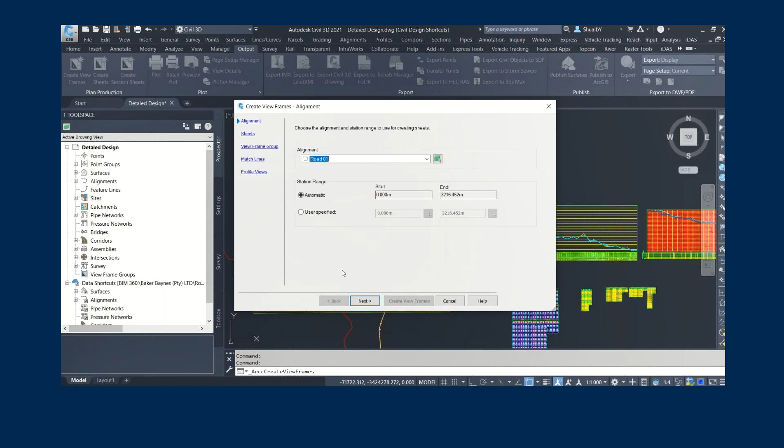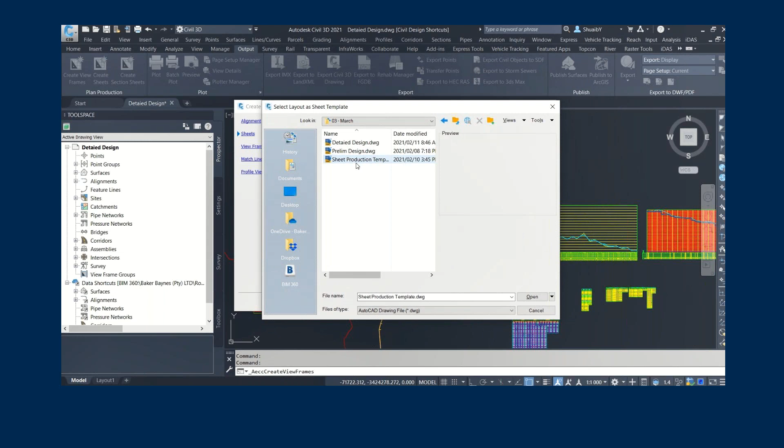Again, it's the plan and profile type of configuration, and I've actually created a quick title block. The thing with the title block is the viewports, as you know, in Civil 3D, need to be configured to plan and profile - pretty elementary at this stage. So I will hover to my webinar folder, here's my sheet template, hit open, and I call it PP for plan and profile, and that is it.

I will just walk you through the wizard very quickly. It will create names, universal style - a lot of these are set up correctly with the template, which is great. Correct band set that I want to use, and once I do that, it generates something called a view frame.

If I select similar, you'll see that I've got about 4 of them. This means that I would have 4 sheets. These can be edited in terms of position and so on. Think of it as a camera taking pictures of the road along the way - simplest way I can put it.

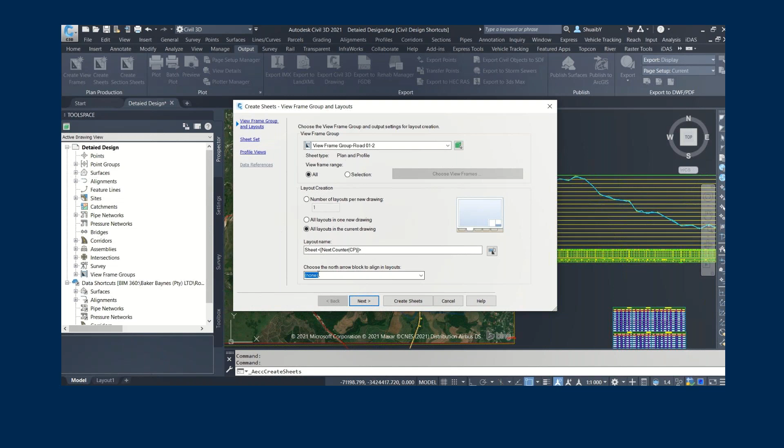So here we are, we're going to now generate the sheet. I have a north arrow on my drawing that is geolocated, you probably would have seen it in my previous webinars. Hit OK, and I will drop in the profile views maybe somewhere here. Let's hit a click. You can see that the profile views have been generated.

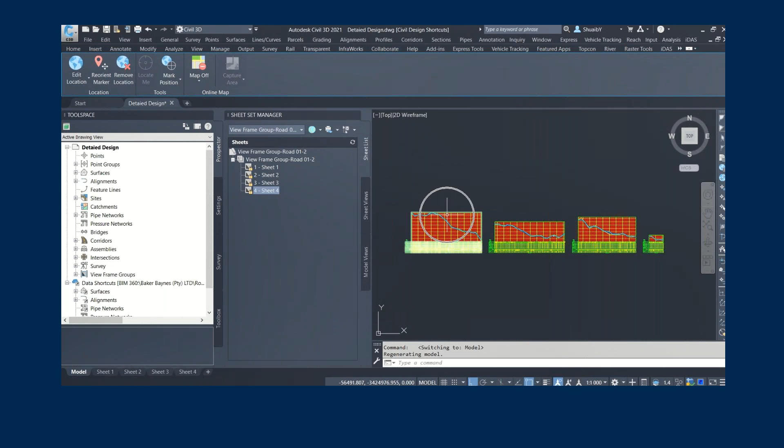Again, you would need to update the bands because they are not dynamic, so make sure that the levels are set correctly on the left and right hand side so that the correct sampling is done - again basic Civil 3D training right there. And these are my sheets. We've created a sheet set in conjunction with it, and this is the result - looking very nice, very crisp, very neat.

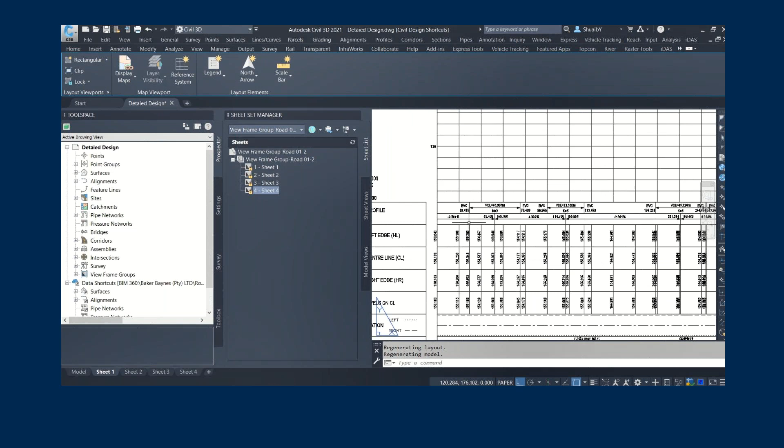Depending on the size of sheet, you might have to do slight adjustments, but if you plan before that, everything fits in correctly. So here we are, we've got our plan on the top. What I can do is I can actually freeze certain elements.

I could, for example, switch off those sample lines. I could switch off the elevation profile with the arrows because you don't want to see that in construction. I will just freeze the sample lines just to show you that it can be done, and here we are. So you can clean up - again basic AutoCAD functionality there - and everything will update according to how you would want it to be. So we've got our plan and profile sheets done and dusted.

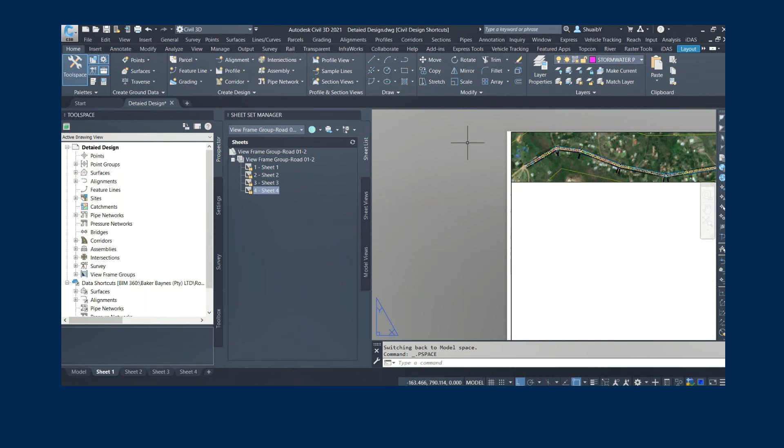You will repeat the process for pipe networks - really simple, elementary. What I will do is I will just publish just a PDF. Unfortunately, this does take a few minutes.

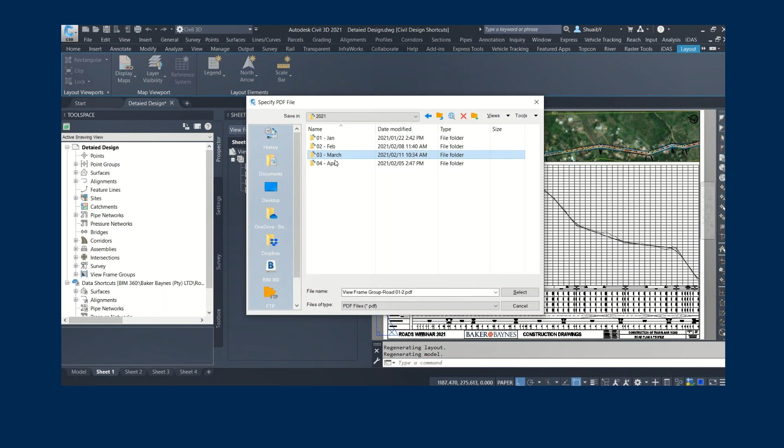I've had some queries that it takes a bit long. This is currently how it works, and I've actually checked with Autodesk, and currently they're trying to improve that. So I will drop this again on my desktop. You're probably wondering why not on BIM 360. I could have definitely done that, but I'm going to show you a feature in part 3 where it will do it much more automated for me. So I will select it there, save it accordingly, and it will export into a PDF sheet set with 4 pages in it.

Okay, and that is it for today. Let's look at our key takeaways. We did cover a really content-packed scenario, but just to keep you up to date on what's going on here.

First of all, we created a project on Autodesk Docs or BIM 360. We gave it a name, we assigned the users to it. In this case, it was Anin, our surveyor, who uploaded the data for our survey in GIS, which I then incorporated into our design. We've got the latest survey data in.

That's where we deleted the Prelim network that was created in InfraWorks. If you created it at a much more detailed level in InfraWorks, you wouldn't have to delete it. But just to show you the power of iDAS, how amazing it is for this functionality, you will see how quick it was to actually generate that pipe network.

We adjusted the inverts using the adjust invert command. And then, of course, you could have gone on with the analysis, defining the catchments, putting your rational method in, getting your Q values, all of those things. Simple, straightforward design process that you would do in consulting.